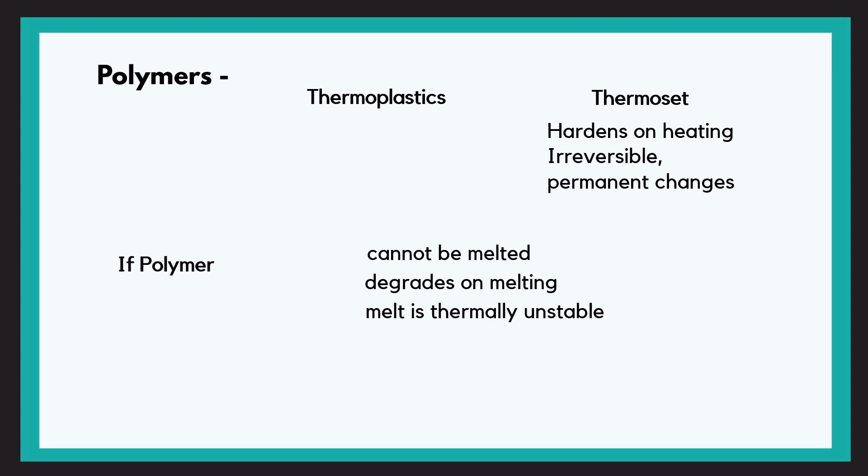They either degrade on melting or the melt is thermally unstable. So obviously we cannot melt spin these fibers and we need a different system for them. So the solution here is solution spinning. The polymer is dissolved into a solvent, the filaments are then extruded and the solvent is then removed. Now depending on the solvent removal process, solution spinning is again divided into two processes. One is dry spinning and the other is wet spinning.

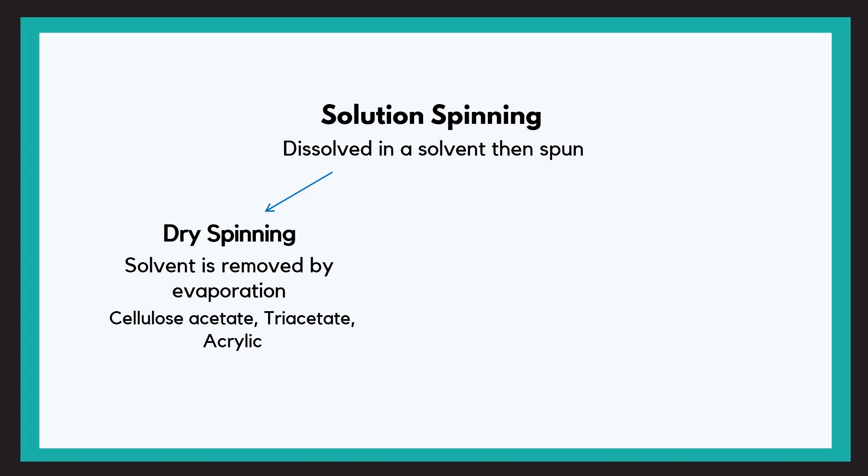In dry spinning, the filament is solidified by removing the solvent by evaporation when heat is applied. Fibers like cellulose acetates, triacetates and some acrylics are produced by dry spinning. In the case of wet spinning, the polymer solution is coagulated in another wet bath. This fluid dissolves the solvent but not the polymer, and thus the polymer precipitates and the filaments are obtained. Viscose rayon, lyocell and aramids are some examples that are produced by wet spinning.

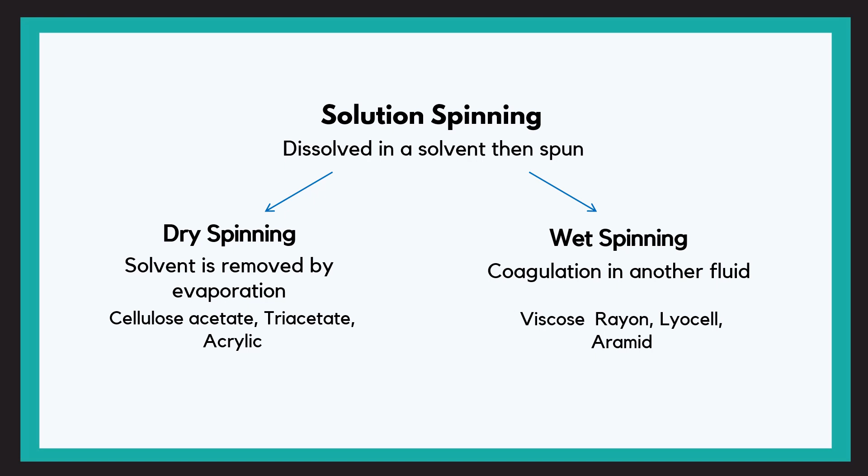So let us look into dry spinning in detail. The very first step is to prepare the spinning solution or dope. The polymer and the solvent are dissolved in mixers at 100 degrees Celsius or higher. Now when we prepare the dope, some impurities like water remain in it. This has to be removed by filtration. Next, a deaeration process is carried out, which removes any air bubbles or any unreacted monomers present in the dope. Now the dope is ready for spinning.

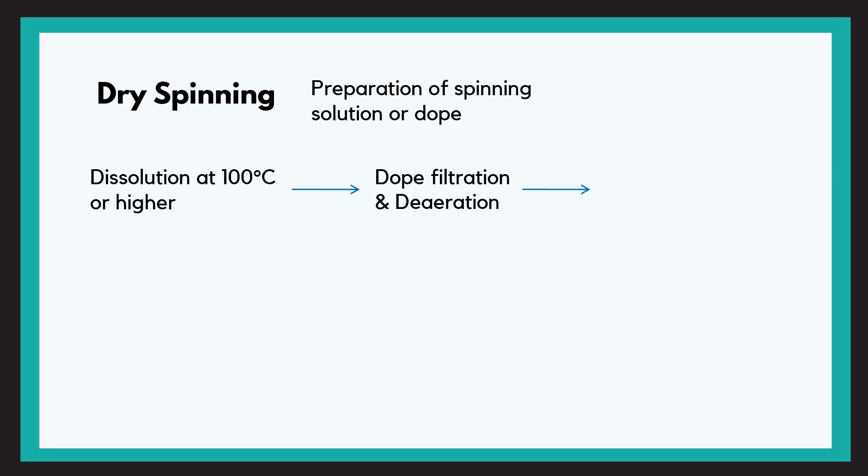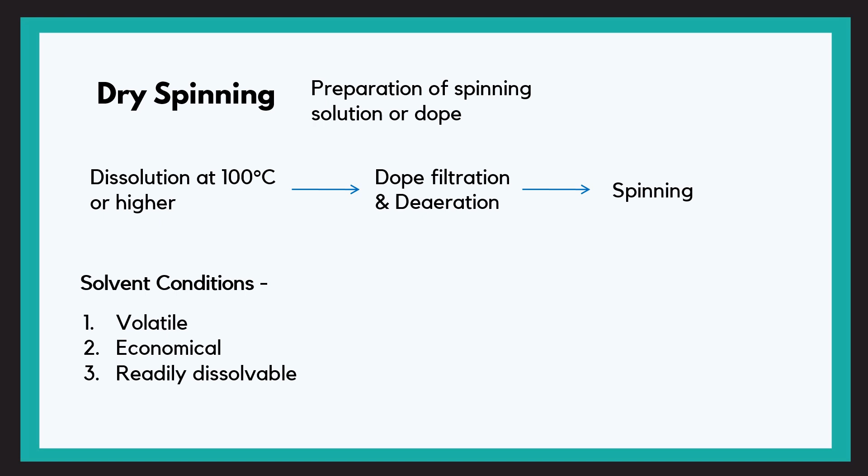There are certain conditions that the solvent has to fulfill. First and foremost, it has to be volatile so that it can be easily evaporated and removed. Next, from the economic perspective, it should not be very expensive and increase the overall cost. And the dissolving power should also be good. We'll now understand the passage on a dry spinning line.

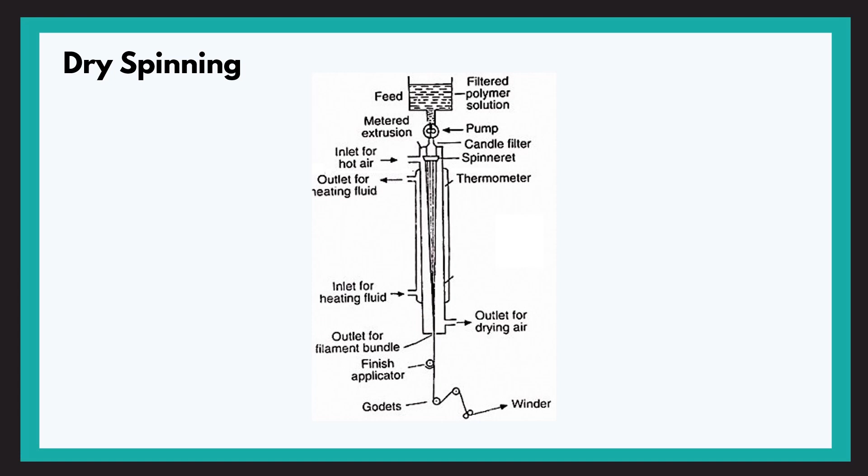The spinning dope is first fed into the chamber, which then passes through the metering pump. This pump only allows the required amount of dope to pass through it. After a filtration stage, it is forced into the spinneret. The filaments extrude through the spinneret holes and then enter into the spinning tube. Now once the dope leaves the spinneret, it bulges.

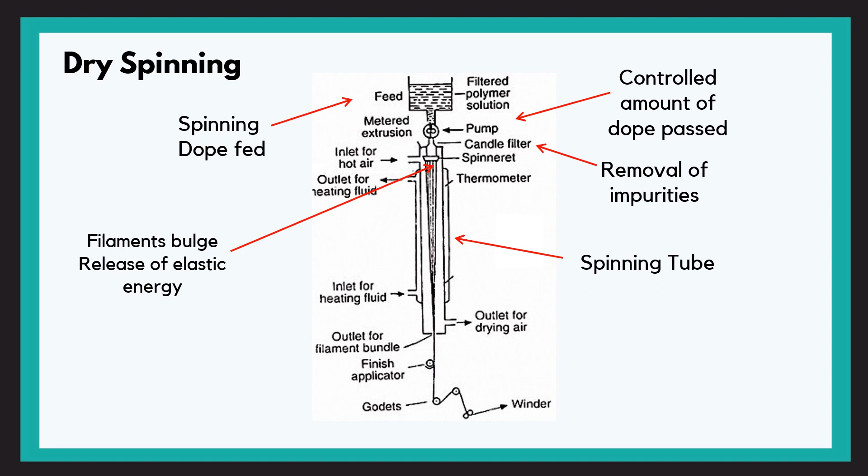Why do the filaments bulge? This is because the polymers are viscoelastic, that is, they store elastic energy. So when they are extruded, they release this elastic energy and thus a slight bulge can be experienced. To avoid filament breakages, optimum viscosity, temperature and takeoff speed have to be maintained. The viscosity is affected by the polymer concentration in the solution, so it has to be kept in mind while preparing the solution, because this also affects the flow properties of the solution.

In this diagram, we can see that the tube has a jacket of heating fluid surrounding it, to maintain its temperature. The drying gas also enters the chamber and flows in the direction of the filaments. Our main objective here is to heat the filament bundles above the boiling point of the solvent in order to remove it. Once that temperature is attained, the solvent starts evaporating and is removed. Around 5 to 10% of the solvent is usually retained in the fiber.

There are a few precautions that we have to take during this process. First and foremost, the chamber has to be leak proof, that is, no vapor should leak. Next, the density of vapors should not exceed the safe limits and the risk of explosions has to be taken care of. So the outlet for drying air sucks out the air in the chamber and also recovers the solvent vapors, thus maintaining the density within the chamber. After this, the yarn passes over the spin finish applicators and is then wound at a speed of around 200 to 1500 meters per minute.

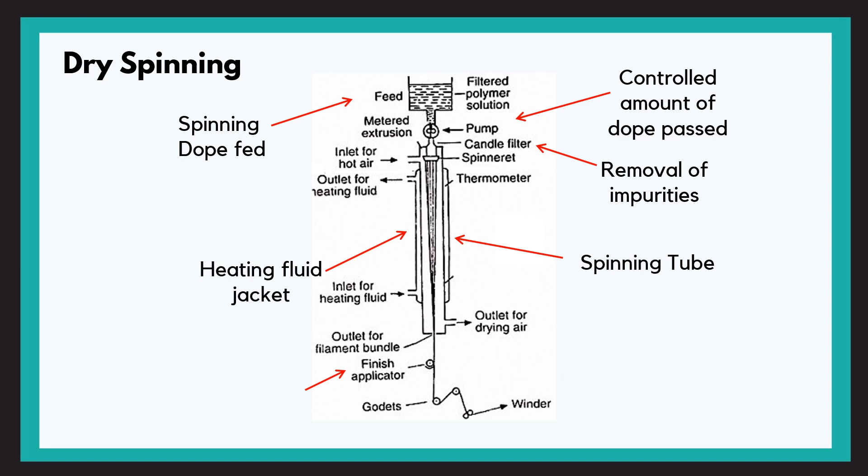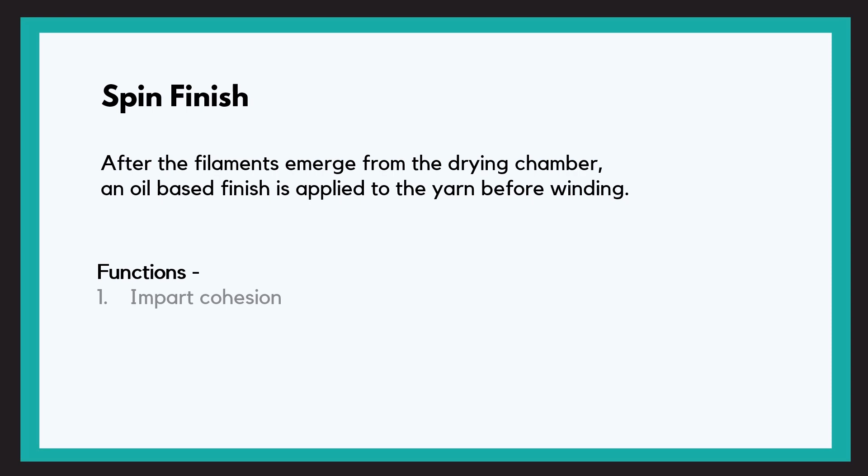Now we saw the spin finish applicator. So the spin finish is applied on the yarn for a number of reasons. First, it increases the cohesion between the filaments. Then it also reduces the friction and reduces the static charge accumulation on the surface.

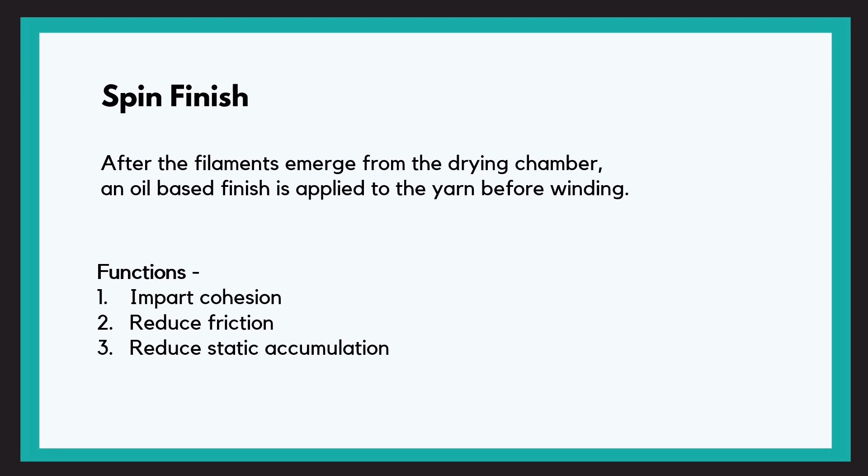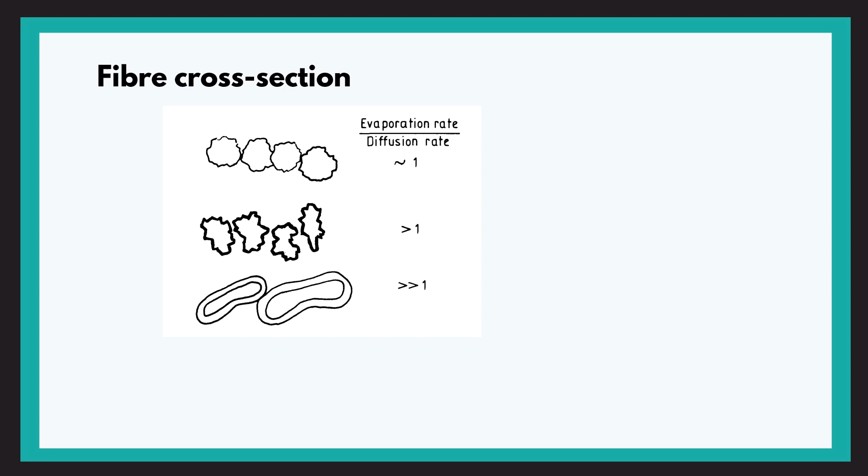Now let us have a look at the fiber cross section. In melt spinning, when round spinnerets are used, we generally get a circular cross section. But in the case of dry spinning, whatever is extruded is a solution of the polymer and the solvent. So when the solvent is removed, the fiber cross section is affected. The solvent has to first diffuse to the outer layer of the filament and then it evaporates into the chamber. So this distorts the cross section of the fiber.

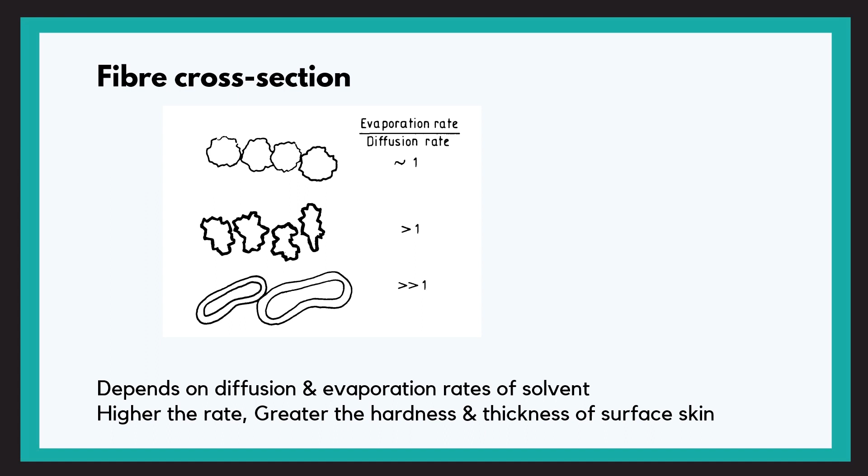The balance between the rate of evaporation and the rate of diffusion decides the fiber cross section. When the rates are almost equal, a nearly circular cross section is formed. The greater the evaporation rate, the harder the surface skin formed on the fiber. When the evaporation rates are greater than the diffusion rates, serrated cross sections are formed, whereas flat or peanut shaped cross sections can be seen when the evaporation rates are much greater than the diffusion rates. So this was all about dry spinning.

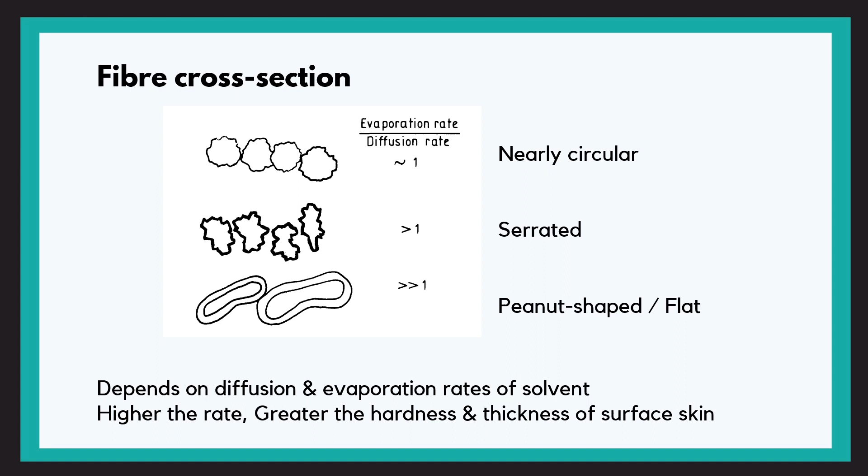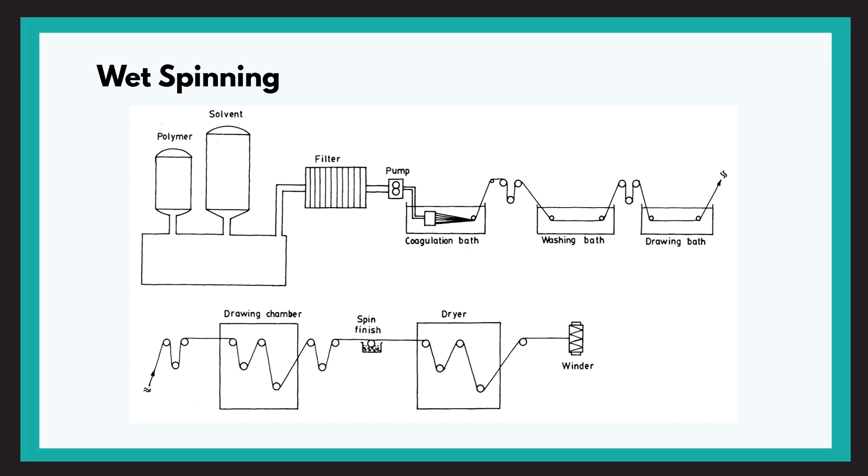Now let us have a look at the process of wet spinning. The solution preparation technique is similar to dry spinning. In this case, the polymer concentration is between 10 to 30%, which is less compared to 15 to 45% in dry spinning. This is because wet spinning is carried out at a lower temperature. The dope is fed and then degassed to remove any unreacted monomers, filtered to remove impurities, and then homogenized. Through the metering pump, the dope enters into the spinneret. The temperature and pressure conditions are lower compared to dry spinning. In wet spinning, the spinnerets can have about 2000 to 50,000 holes.

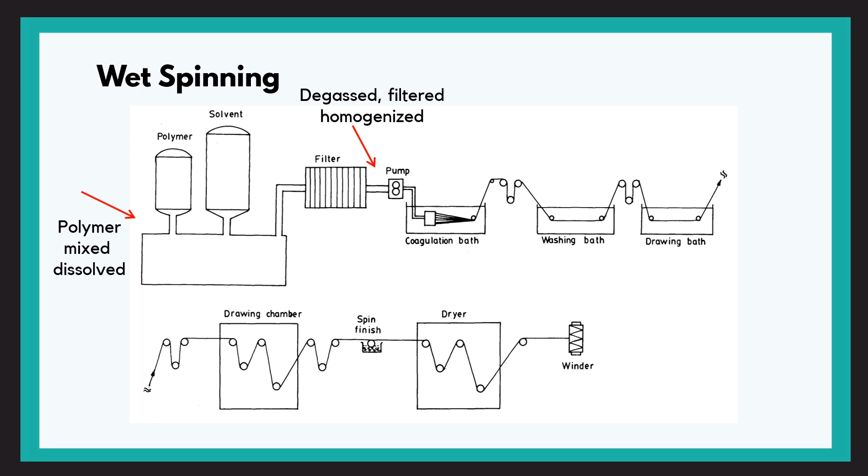Now, the spinneret is submerged in a liquid coagulation bath. The fluid prevents the filaments from sticking together, and this is why a large number of holes very close to each other are possible in wet spinning. As the filaments extrude from the spinneret, they coagulate in the precipitation bath. This is the most critical stage, as during this time the structure of the fiber is formed. The solvent generally dissolves in the non-solvent in the bath and the polymer precipitates to form the filaments.

So at this stage, the viscous solution is converted to an elastic rubber-type solid. This is where the filaments are formed. This is where the polymer precipitates. The filaments are then drawn from the spinning bath and the washing and drying processes are carried out. Spin finishes are then applied and then the yarn is wound.

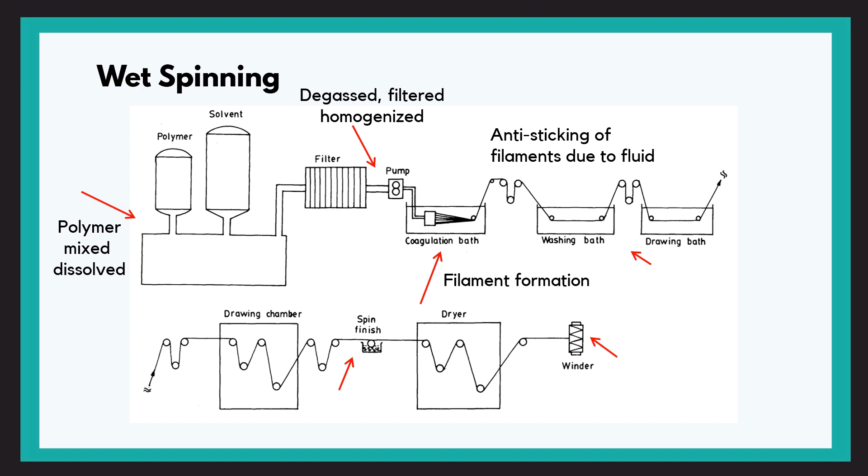Now we'll wind up with a quick comparison between melt, dry and wet spinning. Talking about production speeds, melt spinning is the fastest process with around 2000 to 6000 meters per minute spinning speeds. Dry spinning is slower, between 500 to 1500 meters per minute, and wet spinning is the slowest process, with speeds in a range of 30 to 300 meters per minute.

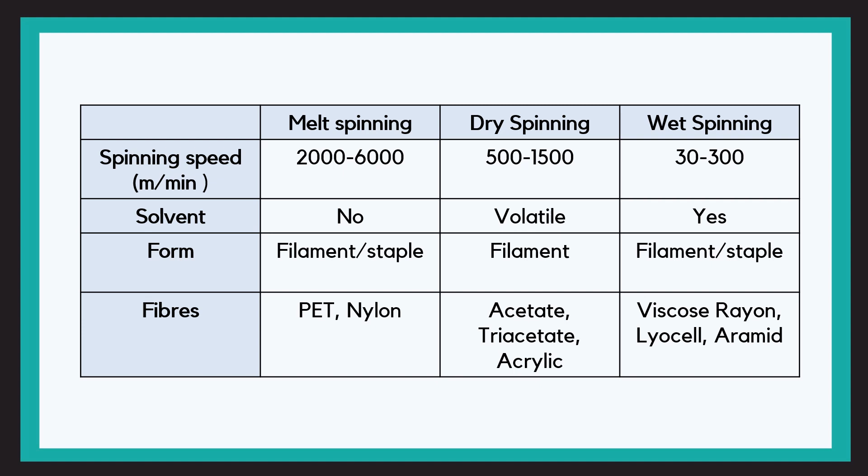In the case of melt spinning, no toxic solvents or residues are involved. Whereas in solution spinning, solvents are involved in wet and dry spinning, and sometimes toxic solvents or toxic residues are there in the process. Both filaments and staples can be produced in melt and wet spinning, whereas in dry spinning, only filament formation is possible. So this was all about solution spinning, and melt spinning has been discussed in another video.